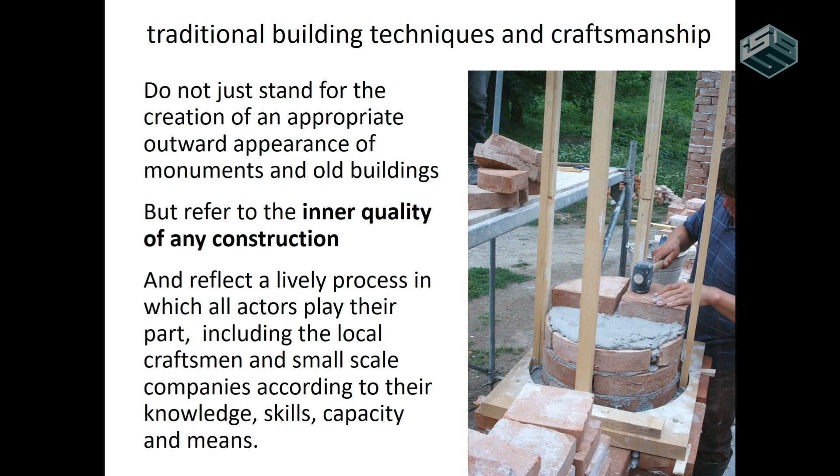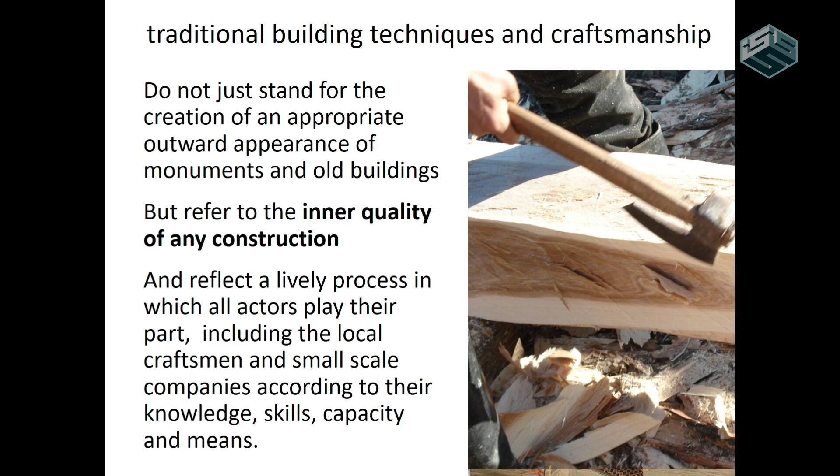I'm strongly convinced building in a way appropriate to historic structures, regardless whether it is a registered monument or not, does not just mean to maintain, to restore, or to copy an outward appearance, but it is to construct in the traditional way. It is the inner quality of the structure which gives the spirit and the atmosphere to a house, and which provides the physical conditions to feel comfortable or not.

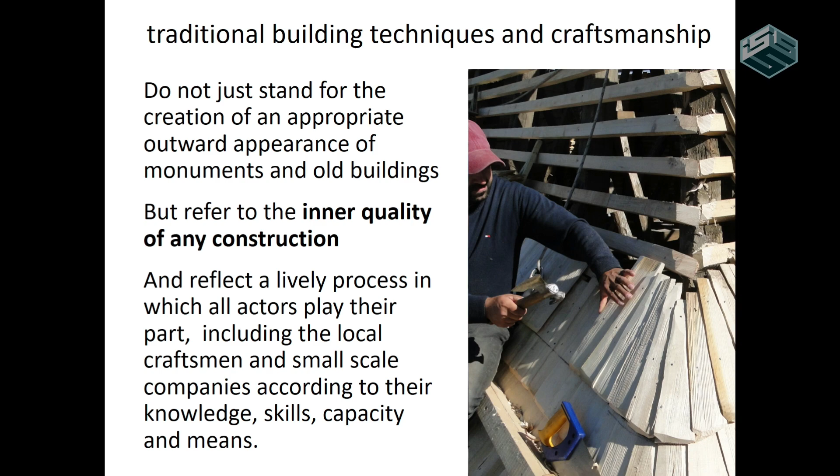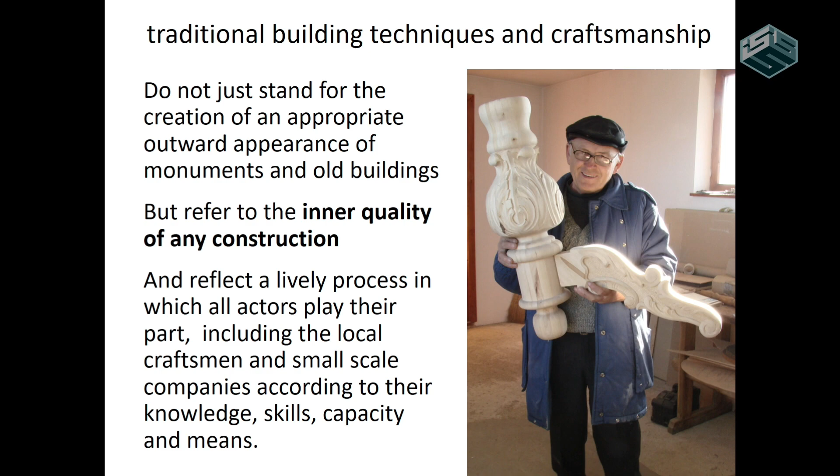So in this respect, the building process reflects a very lively process in which all actors play their part. All the local craftsmen, the local small-scale companies put their stamp on the design. And so this is, for me, also very nice to work with this always unforeseen, slightly differences. And they bring in just their knowledge, their skills, their capacity and means wherever it is. It differs from village to village.

Traditional building technologies or techniques are, first of all, sustainable in terms of local economy, cycle economy. They create jobs and income for the villagers. They have the very best potential for preserving local identity, even for new buildings. They are part, or should be acknowledged as part of, the immaterial cultural heritage. And they are meaningful and healthy activities and contribute to the appeal of neighborhoods, that counts for villages as even more in urban quarters where we have a lot of skills and a lot of craftsmanship.

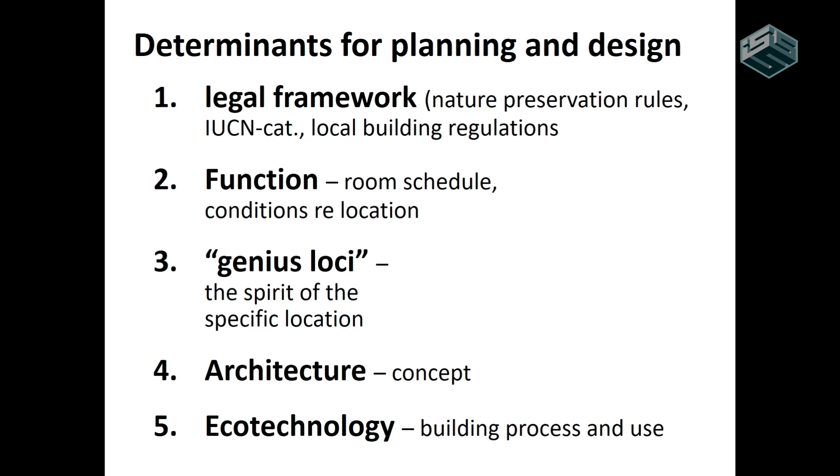All the pictures you saw are all from our projects, so these are not just pictures, it's all during building of our projects. It is nowadays not easy. It is quite a complicated thing to plan, because we have to follow so many determinants which are all influencing the house, the design of the house.

And even here is little remaining. It is the leaves. It's remaining from the conference in Sweden, from the Mariestad conference. It's their emblem. So all these we talked about Genius Loci, for instance, and others.

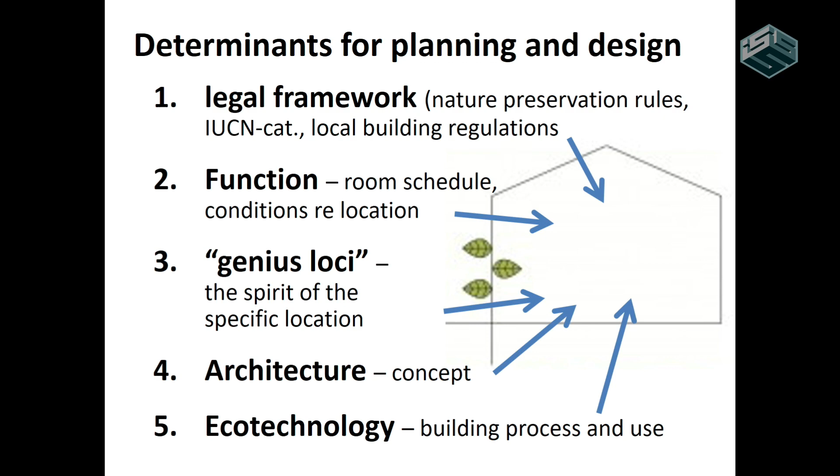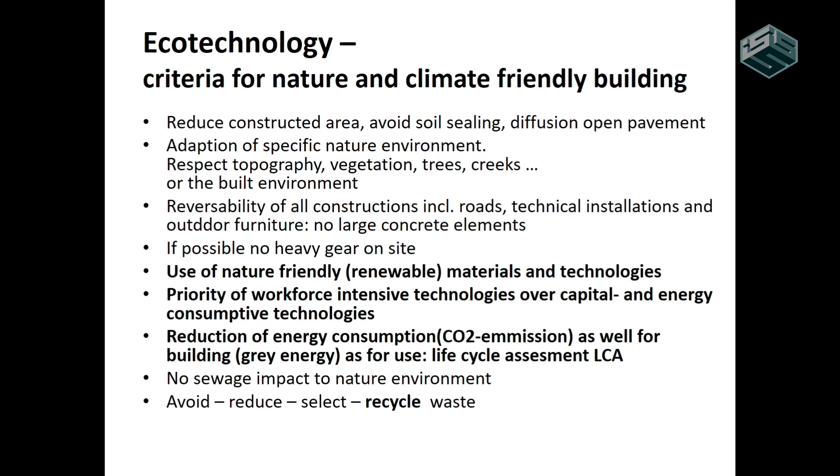So I will just refer to eco-technology. What is eco-technology? For a project to build in nature reserves, I once developed criteria for building nature and climate friendly. And for me, as an architect, I consequently follow all of them. Please read them all. I just now will refer only to the bold points here, because time is short.

Certainly the use of renewable, nature-friendly, renewable materials and technologies, certainly. For me, priority of workforce-intensive technologies over energy-consumptive technologies, which are capital-intensive technologies, it's a very crucial point.

It's a political discussion. In the past decades, labor was made artificially more and more expensive by loading all the taxes and social contribution costs just on the labor. So labor in Germany, for instance, is almost impossible to pay, but this should be reversed. We should fight for that the workforce, human labor, is one of the best and almost unlimited renewable resources. Why don't we use them in a better way?

And this refers to these traditional technologies, because they are all, as you saw before, all based on a lot of workforce. And finally, the point here, reduction of energy consumption. So the reduction of carbon emission is very crucial, and this will be, by European regulations, respected for all countries. So it refers to every activity.

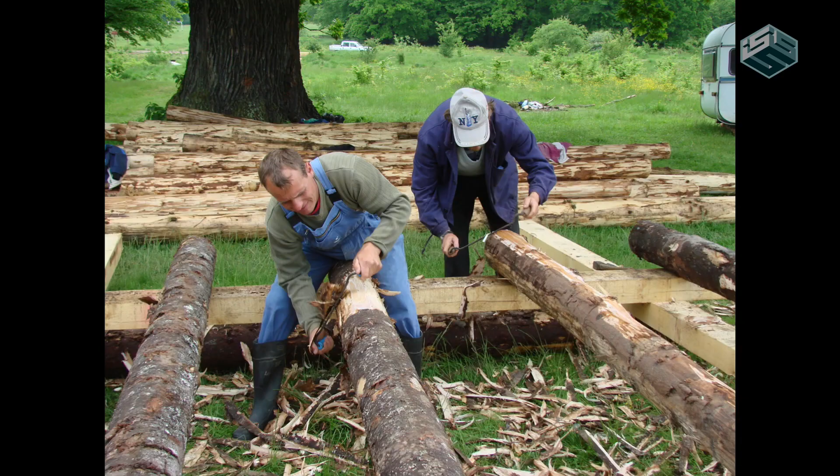So this is built already some 15 years ago, and this was made very consequently in these ideas, just with the material from the nearby forest, brought there by horse carts, and then treated in the traditional way, all the same. And even the foundation has been made just with local stone and earth, nothing else, so very consequently these ideas. But this is not enough.

For me, as an architect, it is the big challenge to create new modern designs by means of traditional materials and handcraft technologies, which is just the opposite approach of what we find usually and so often, which is the copy of historic patterns by new industrial means. So my point is just the other way.

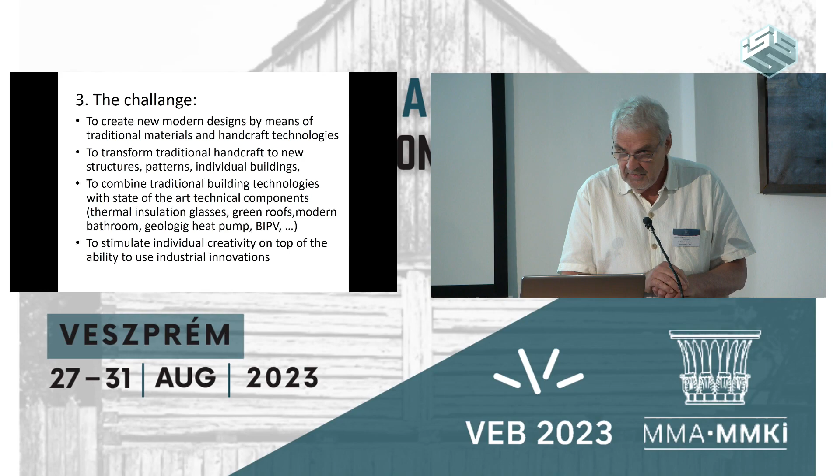And to transform these traditional handcrafts into new structures, new patterns, individual buildings, or even furniture. And also to combine these traditional building technologies with state-of-the-art technical components like thermal insulation glasses, green roofs, modern bathrooms, geologic heat pumps, building integrated photovoltaic. These are all the topics we have to deal with now. We all want internet, so then we have to deal with the modern technologies as well. But my challenge is to combine it and to deal with these modern industrial innovations in a very creative way.

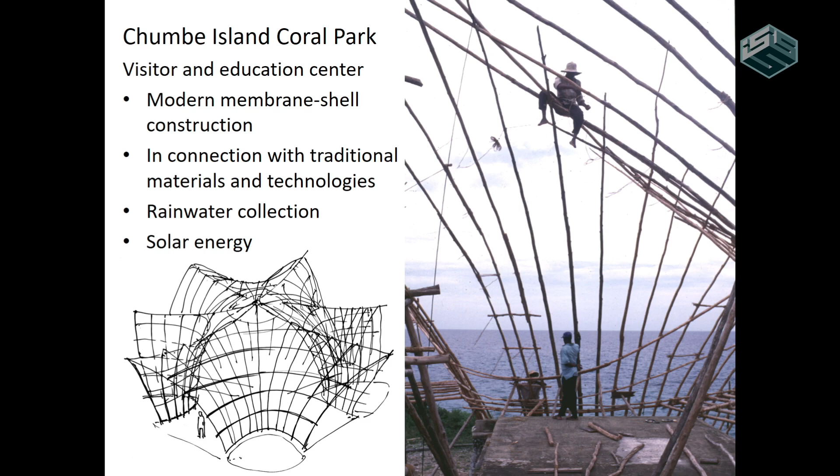One more example is this, made some 25 years ago on Chumbe Island Coral Park. Please Google this, it's very interesting, a very successful project. This is the first and only private managed marine nature reserve in the world, and we made there an environmental education center and a small hotel to finance it.

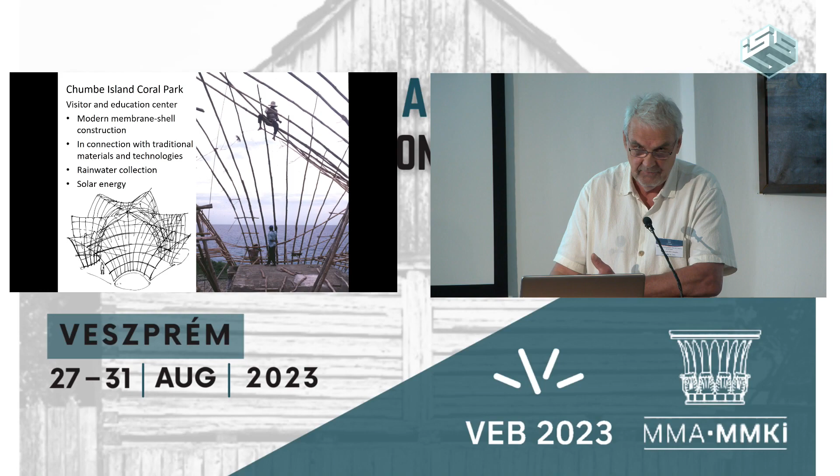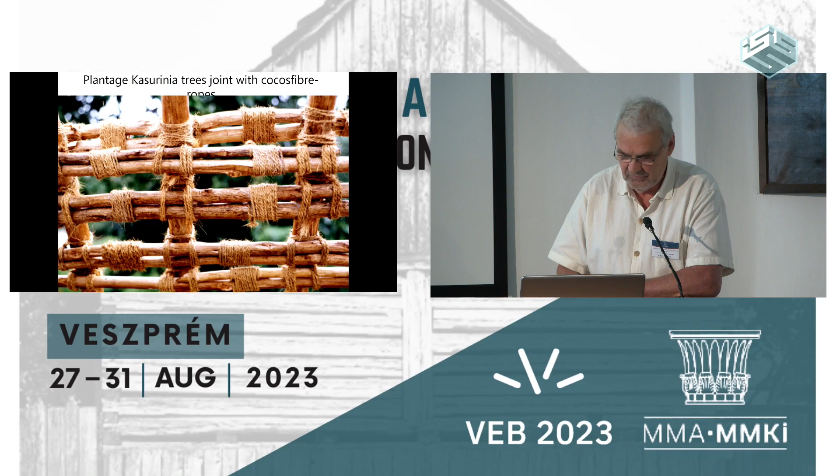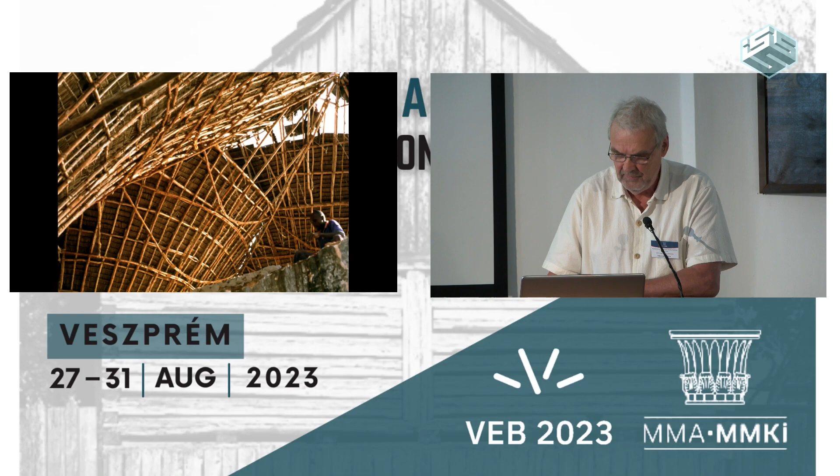We transferred the very common and traditional way of making the typical Zanzibar Makuti roof, which is just a plain, flat, steep roof, into a double-bend membrane shell construction. That was an island situation, so we had to care for electricity and water, rainwater collection, solar energy. This was all made in the completely traditional way, using casuarina trees from a plantation, bent with coconut ropes made wet before, and when they dry they become very strong connections. It was like a huge basket of 35 meter diameter, made in the traditional way but with this new structural idea, and covered with palm leaf shingles.

Another example, from some 6 years ago, is a hide in the forest area, in the nature reserve in Romania, in the Carpathian Mountains. Before, the big shots of the forest came there to hunt bear; now the tourists come to take pictures, and it's all preserved.

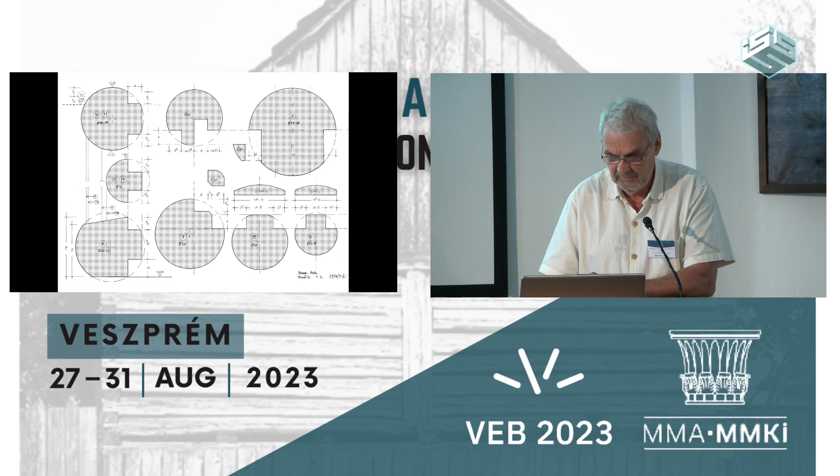We modified the traditional way of round log wall construction so that these big panorama glass windows, completely noise tight, can fit. This is a modification of a traditional way, and it's also very well accepted, fully booked, very popular and very well liked. The tourists like it to stay there and watch the bear outside.

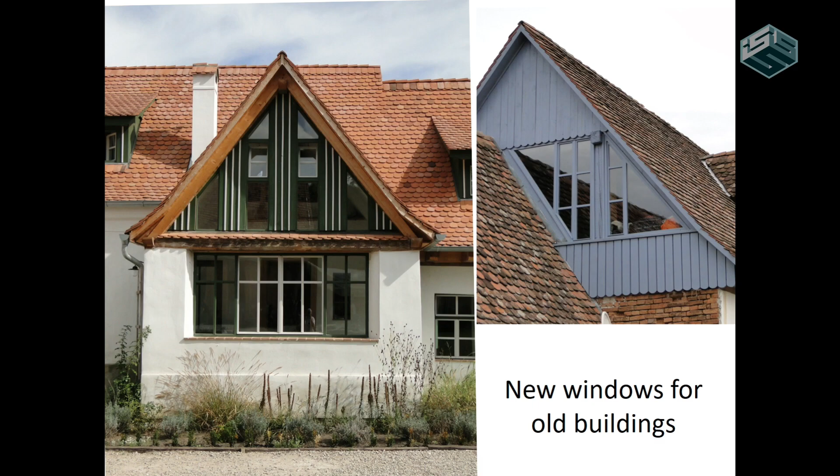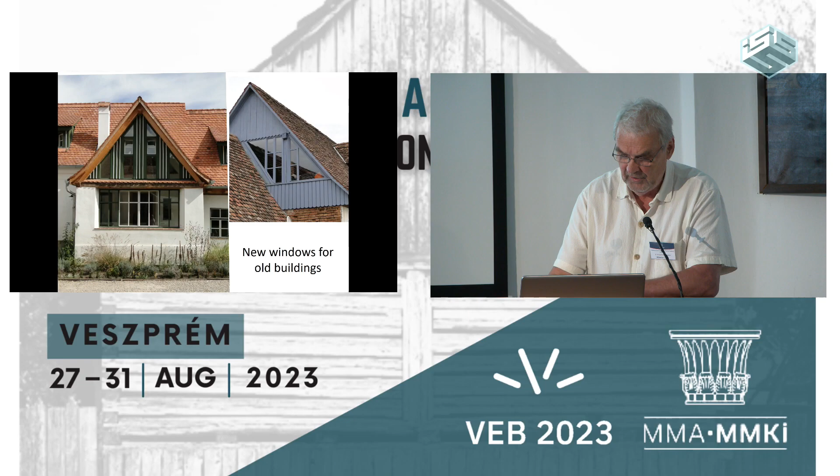Just a few words about windows, because this is the big issue always in old peasant houses. They have all small windows, and it's always difficult for modern use to get more light inside. For me the challenge is always to be creative with the surfaces we have available without affecting the character of the house, to modify these surfaces to get more light inside.

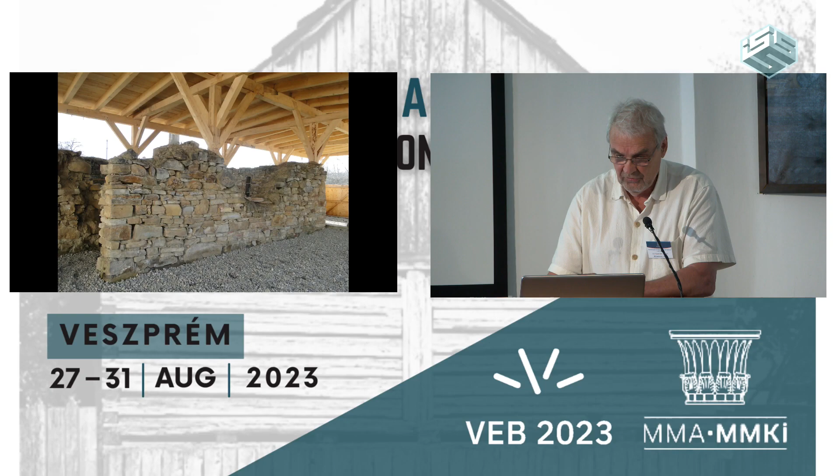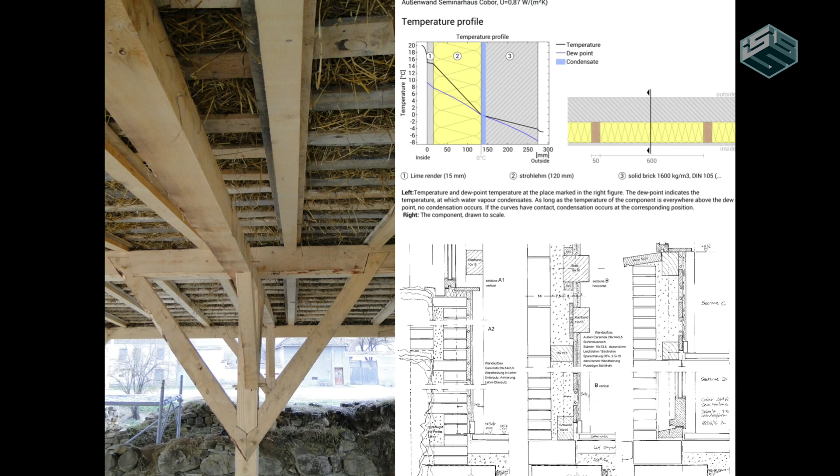This is a project, I'll rush through this a bit because time is short. This was a ruin of a peasant house, and there should be a seminar house for the Cobor biodiversity farm in Romania. We decided to leave this ruin inside as an architectural element remaining from the past, and we created a new wooden structure in the traditional way. As you see, all the joints are done very much the usual way.

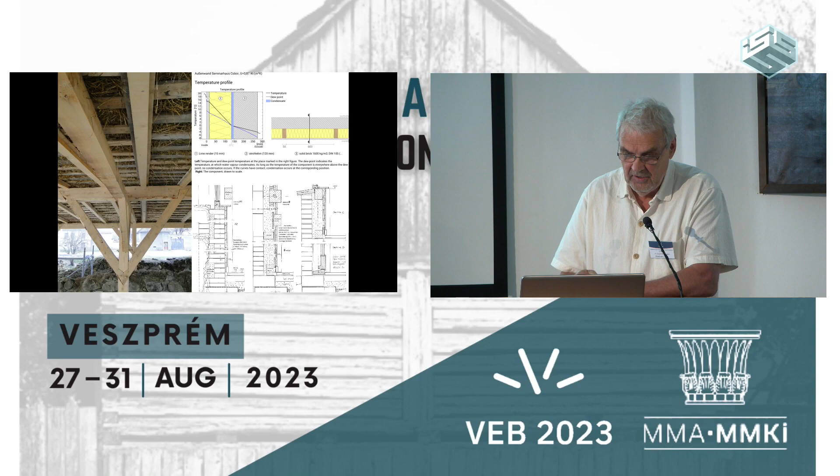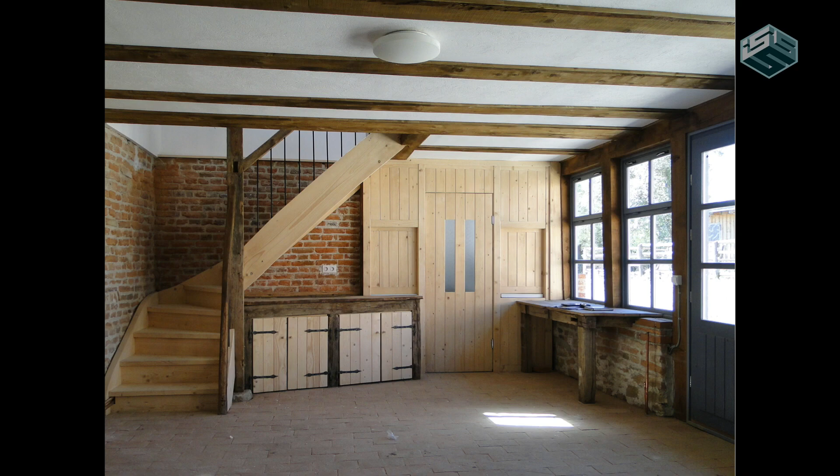In the roof there's straw insulation, with all the calculations and technical details needed for this. The seminar house is very much used, with a very simple interior, and even the furniture and interior items follow traditional means. For instance, all the hinges are made by the blacksmith in the village, something like this.

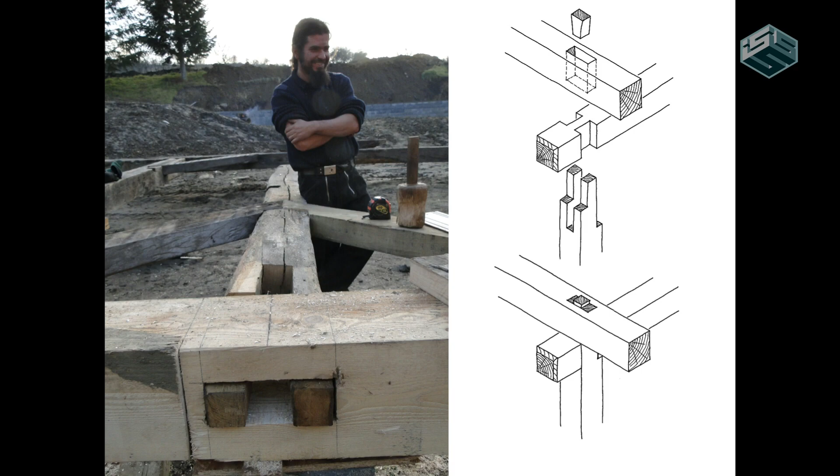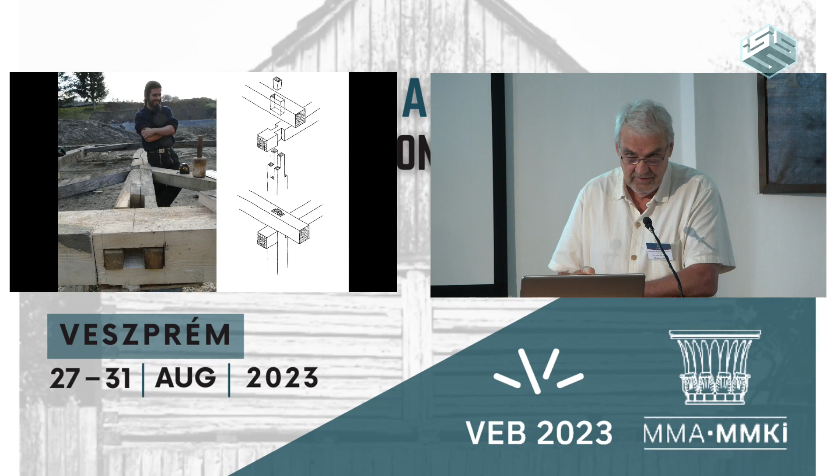Another project, this is a barn. We had already a barn in Transylvania, but it was gone some years ago, so we had to reconstruct a new barn. Then we bought an old barn and repaired it with new elements, as you can see here, but in the same traditional kind of barn construction. The right-hand picture shows it as it was usually made.

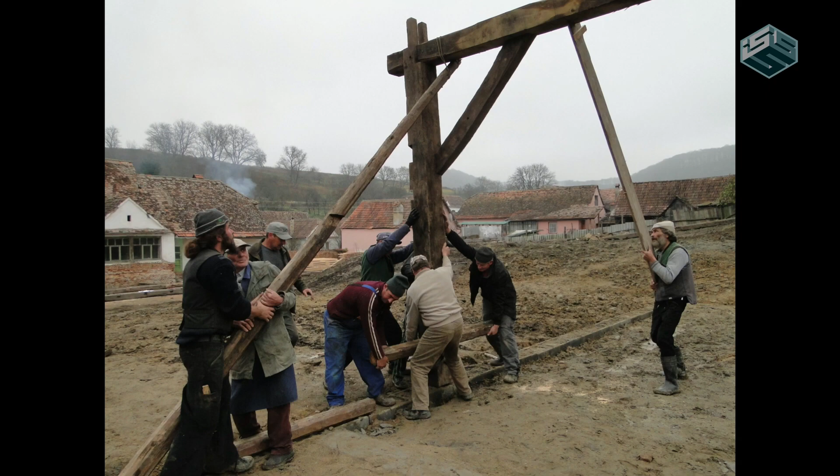You can see it was erected with a lot of manpower, without additional means, just as it was done in the past. Even the tools here, these are very old carpenter's tools almost unknown nowadays, but we still use them, these sticks to erect them.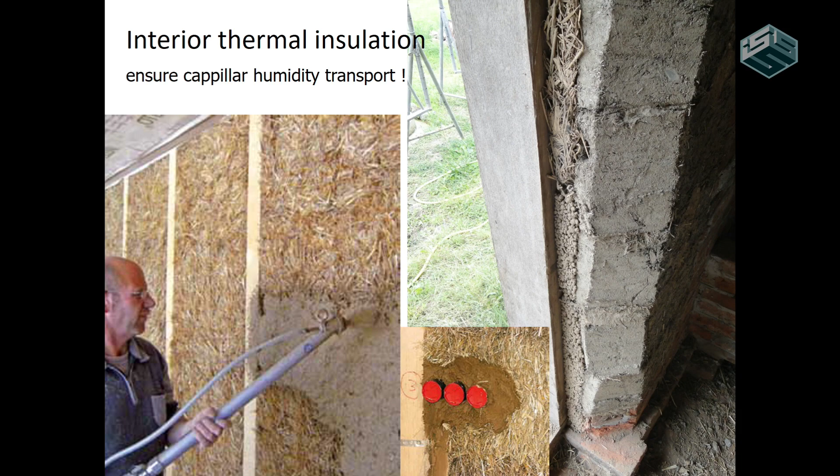That comes now to the thermal insulation, interior thermal insulation. For such a building we need some additional insulation, certainly. I would like to refer here to a small brochure, a market overview of insulation materials from renewable resources, issued by the Agency of Renewable Resources from the Ministry of Agriculture in Germany. It has all these certificated materials with their properties and technical details. I'll just pass it around for you to look at.

I use only these natural materials because they all have one very big physical advantage: they have a humidity and heat storage capacity, completely different from mineral and other materials which have none. So we have a completely different physical treatment of the whole wall. We don't need an interior blocking foil or similar - it's simply not needed.

As you see on the right-hand picture, this is a framework house with a very thin framework outside wall, and inside we have straw clay blocks with a backfilling of straw clay. At the bottom here is a backfilling of expanded clay bubbles, a mixture, and up there a backfilling just of straw and clay. This brings much better thermal insulation properties than without, and it is only these capillary-active materials which don't need any other construction, and they follow the traditional type of material - they have the same properties, similar to the old materials already there.

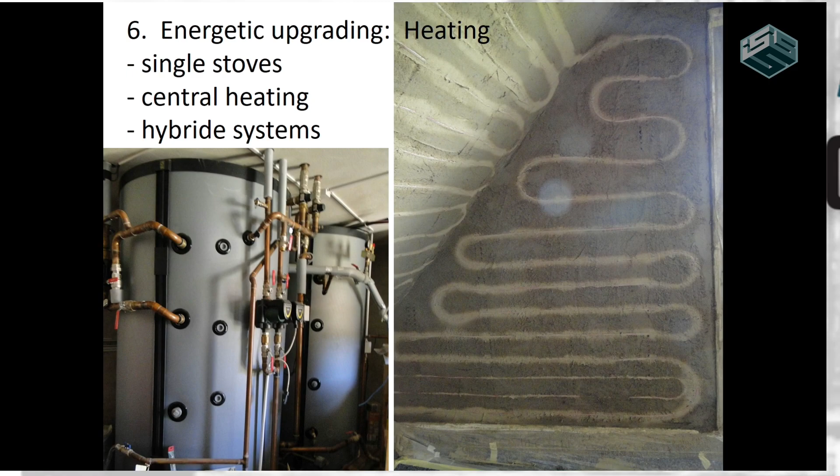Heating is also a big problem - that's another presentation though. We have several systems: single stoves, a conventional central heating system, but nowadays usually it's a hybrid system, a combination of some of them. These hybrid systems, in general, run most efficiently with low temperature, so we have heatings running with low temperature as floor heating or wall heating.

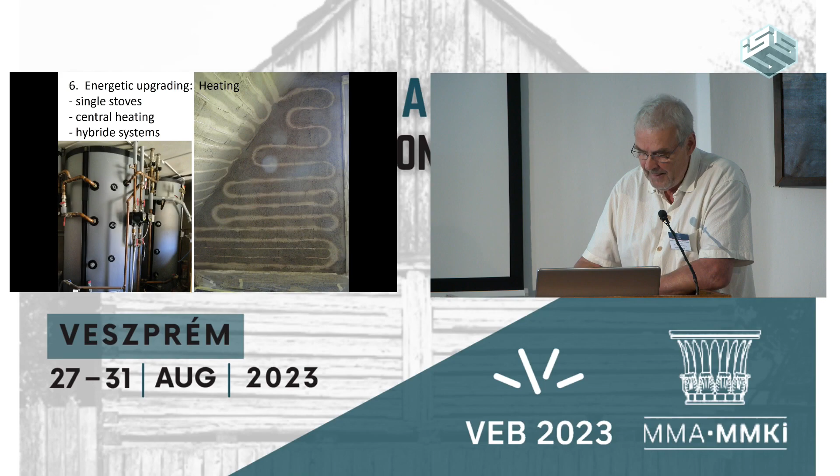On the right picture you can see such a wall heating in the drying process - you see the heating pipes in the clay plaster. We even did it in roof slopes. It's very much possible to use the roof slopes for heating too, which is very convenient, as I learned from an expert on heating systems. So this is then finished with clay plaster.

My last point is building-integrated photovoltaic. A few statements which I learned from other experts: the future is electric.

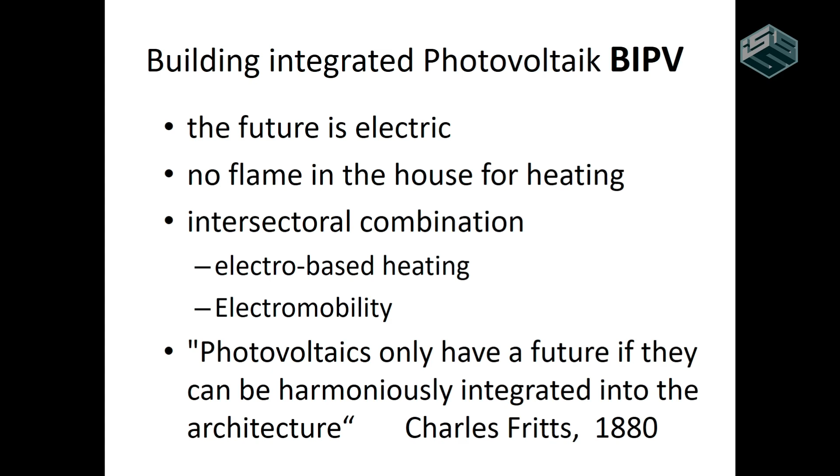No carbon emission from heating in the house, which means no flame in the house in the future.

The building sector is one of the sectors which always misses the target for carbon emission reduction across all nations. I think in Germany at least this is the case. In Finland and Scandinavian countries they are better off, but here in Hungary or even Romania this is not even known. But this is the point - the reduction of carbon emission in the building sector.

The intersectoral combination is very interesting because once the building sector was electro-based heating, but we also have electromobility. Cars in the future will only be electric. In Germany it's terminated - from 2030 onwards, no car will be produced with fossil fuel anymore.

As planners, we always have to anticipate the future. We have to see what happens in 30, 40, 50 years - how will our world be then? If we like it or not is not a question; it's how to anticipate it. So we will not get around the idea of creating electric energy, even decentralized with photovoltaics on the house.

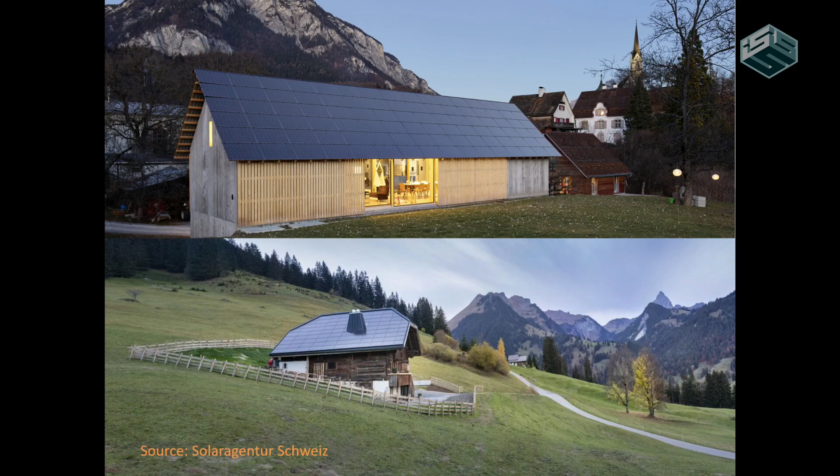The idea is to find, and the future will develop more and more, ways and modules and technologies that we can deal with in a very creative and appropriate way. Some samples from Switzerland - they are very much in front of this. They have quite nice, modern buildings which fit into the traditional landscape, even with photovoltaic roofs. From Switzerland, we can learn in this respect.

In Germany, this is a big thing even for monuments. So far, monuments always said not possible - we cannot make photovoltaics on monuments. But they see we have to deal with this, and they accept that if the church community says we need to create our own energy here, we cannot pay the high costs of electricity, we have a roof, we want it. So the idea of integration is now also very common for monuments. It will come, and we have to deal with this as architects.

One sample here is again in the Carpathian Mountains. It's an old forest house which was not used anymore - not valuable architecture - and the roof was made with all these little complicated bits. It was leaking and the full roof construction was completely rotten.

So we turned it into another building. It should become an education center for school classes there in the Carpathian Mountains. It is turned into this - it looks completely different, but it's based on the old building. And we have this big photovoltaic roof there as well.

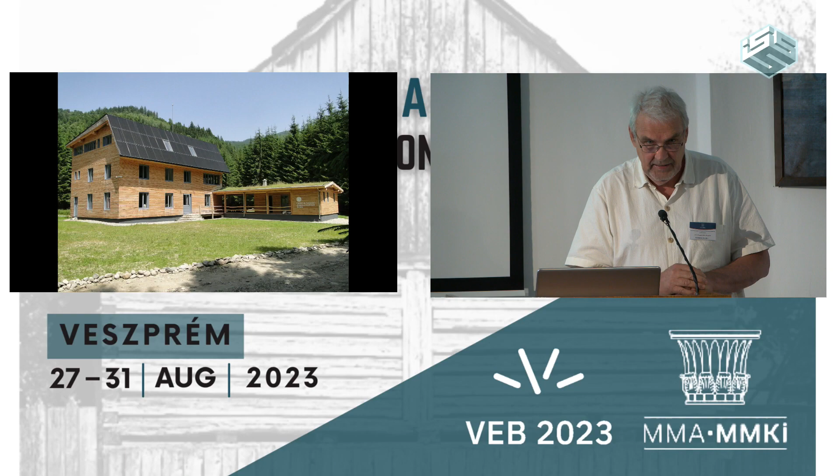It's an island situation again, so there's no electricity, and so far it is a passive house - it creates its own energy. The form of the roof is made because of the winter season. In summer there's always enough energy and sun, and we don't need heating. But in winter, the sun is low, so it's a better slope for the sun, and even more important, snow will not stay on it. So it can also create electricity in winter.

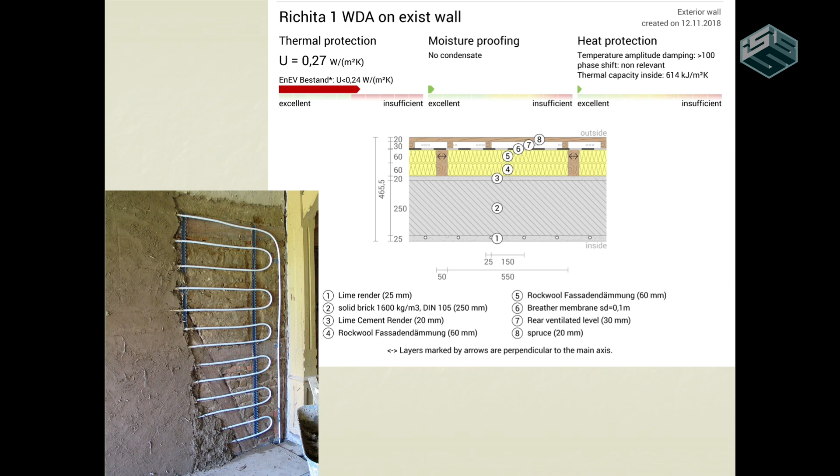Here we have also calculations, and again we have wall heating with clay plaster. The outside is made with rock wool insulation.

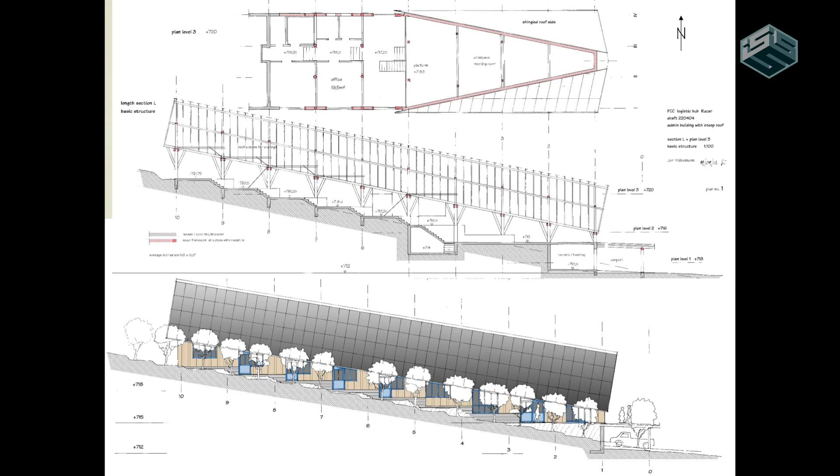Now this is my recent project, my actual project now - it's in process. It is an office building on a hill slope in an apple orchard, and we make it as a wooden frame structure with straw bale walls and a big solar roof.